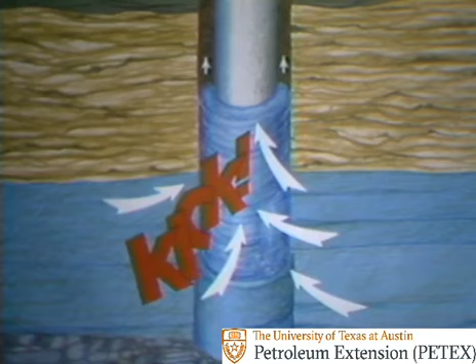Pretty awesome. But before a well blows out, it kicks. Formation fluids enter the hole. These fluids force or kick mud up the well bore. If you don't take the right action right now, your rig could wind up like this.

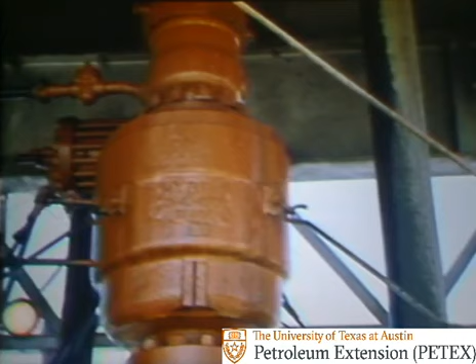So you have to contain a kick. And that's what the blowout preventers are for. When closed, they contain the kick. A closed preventer seals off the top of the well. It's like closing the valve on a pipeline. With the BOP closed, no more kick fluids can enter the hole.

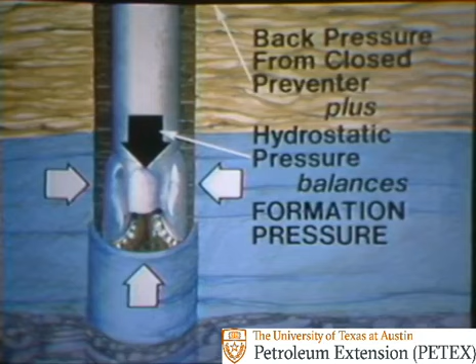Back pressure from the closed preventer plus the hydrostatic pressure of the mud balances formation pressure. No more formation fluids can flow into the well. And that's why you have to close in the well when you detect a kick.

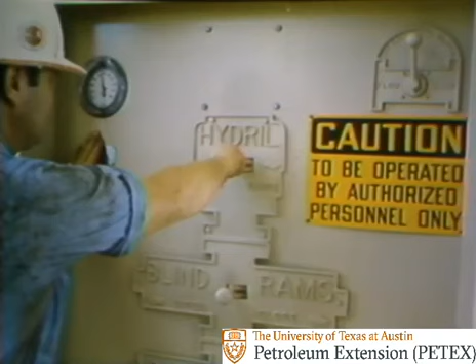But you got to know what you're doing. Use the preventers carelessly and you could cause problems. You could even lose the hole. So let's find out more about well control.

Here's some of the major causes of kicks: mud weight not heavy enough, not keeping the hole full of mud, and swabbing the hole. Let's look at these in more detail.

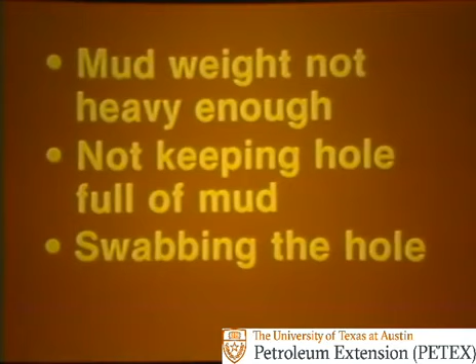First thing is mud weight. The mud's got to be the right density or weight at all times. Otherwise, this could happen. The mud won't put enough pressure on the formation, and formation fluids enter the hole.

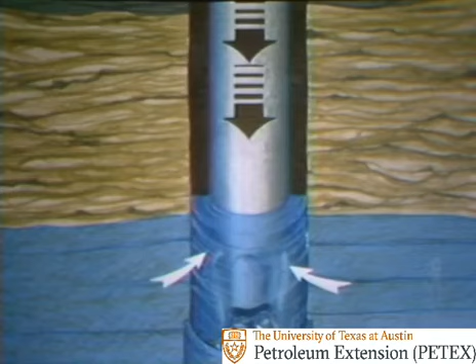Of course, the heavier the mud is, the more pressure it exerts. But you have to use mud that's the right weight. In fact, drilling's usually done with mud as light as possible. The rate of penetration is faster with light mud, so the possibility of a kick is always present.

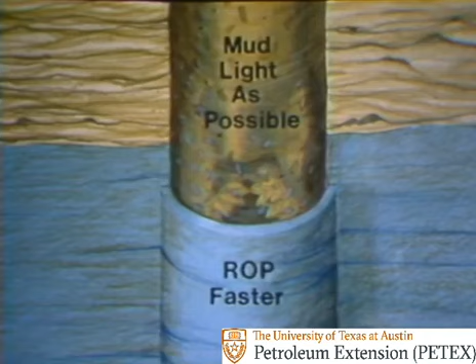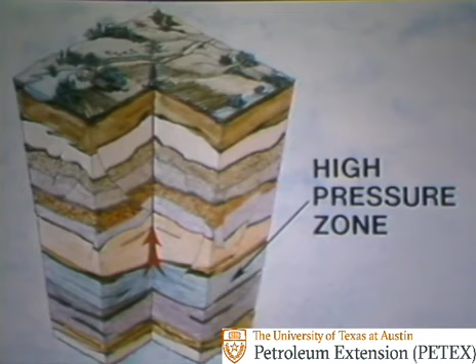Also, wells are being drilled deeper than ever, and the deeper you drill, the more likely you are to penetrate zones of high pressure. Drilling into a deep high-pressure zone could mean that the hydrostatic pressure exerted by the mud is too low to hold back formation pressure. For example,

here the hydrostatic pressure is 5,400 psi, but the formation pressure is 5,800 psi. The well's kicking. The mud weight is not heavy enough to hold back the formation pressure. So you got to watch out for high pressures when you're running that brake.

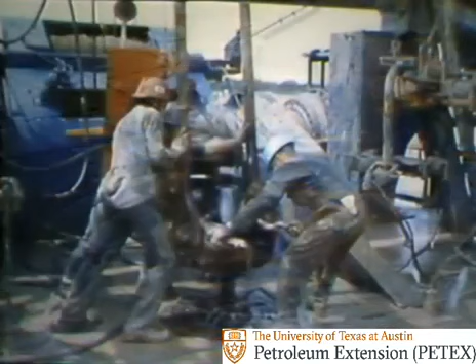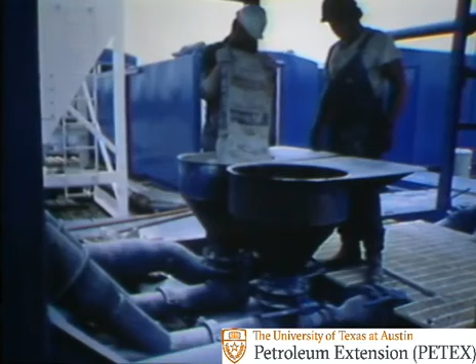Okay, so much for drilling, but nearly half of all kicks occur during a trip. So, to avoid kicks while tripping, be sure to condition the mud before you start out of the hole. And as the pipe is tripped out, keep the hole full of mud.

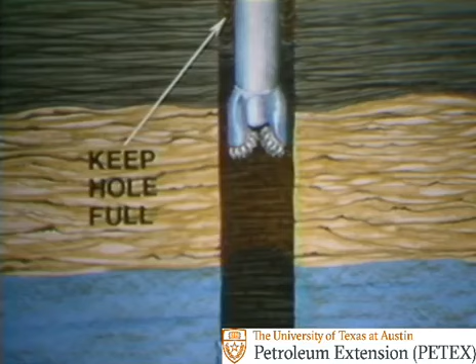Keep the hole full at all times. Remember, hydrostatic pressure depends on the height of the mud column as well as its density. So when you make a trip, slug the pipe so it'll pull dry. This keeps mud in the hole where you need it.

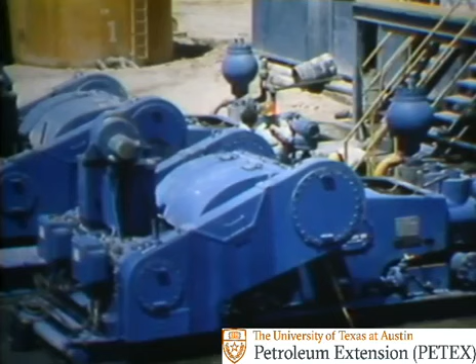Also, carefully measure the mud pumped in to replace the volume of pipe pulled out. Point is, keep the hole full of mud.

Another problem during trips is swabbing. The bit and drill stem can act like a swab or piston and pull formation fluids into the hole. Here the hole's full, but not of pure mud. Swab in enough formation fluids and you reduce the hydrostatic pressure. The result could be a kick.

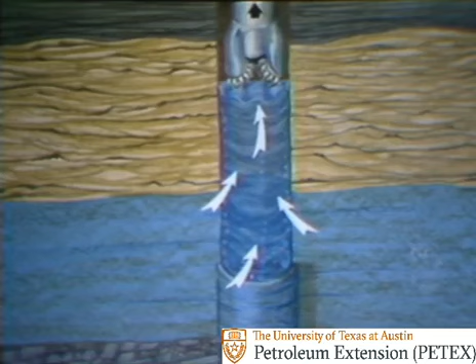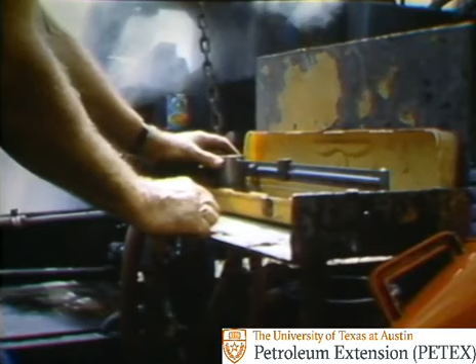So what do you do to reduce swabbing? Well, when the mud's real thick or viscous, swabbing is more likely to occur. So when you can, keep the mud's viscosity down. Also, when your mud weight gives you only a small hydrostatic overbalance, watch out for swabbing.

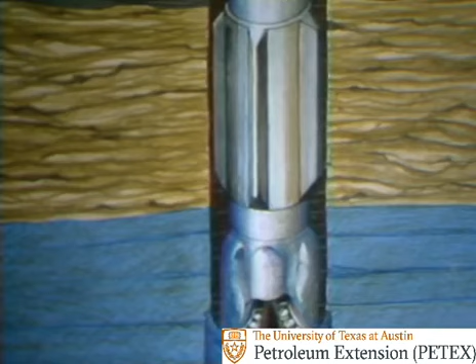Swabbing is more likely, too, when the bottom hole assembly is pretty close to the size of the hole. In effect, the piston's bigger, and it'll be more likely to swab. And if you pull the pipe out of the hole too fast, you're more likely to swab formation fluids into the hole.

So be sure to properly condition the mud before you trip out and pull the pipe slow enough to minimize or prevent swabbing.

Here's one way to know that you've swabbed. You'll notice that less mud is needed to fill the hole because of the swabbed-in fluid.

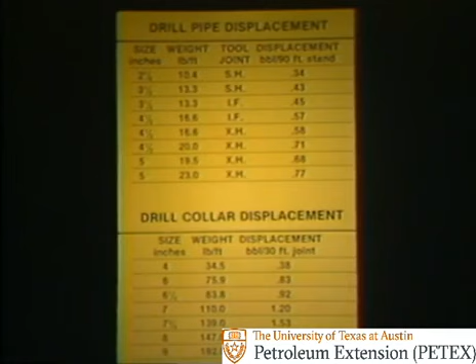For instance, reading left to right, if you're pulling 4.5-inch 16.6 IF drill pipe, each stand displaces a little over half a barrel, 0.57 barrels to be more exact.

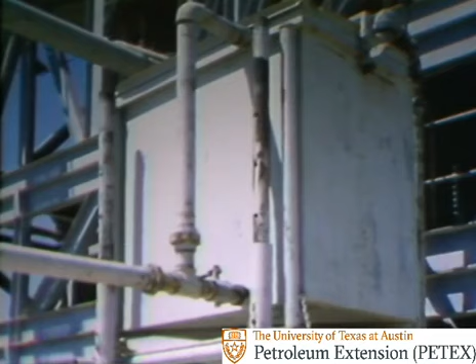You can use a trip tank to measure the number of barrels it takes to fill the hole. This is the most accurate way. But you can use a pump stroke counter, even though it's not as accurate as a trip tank.

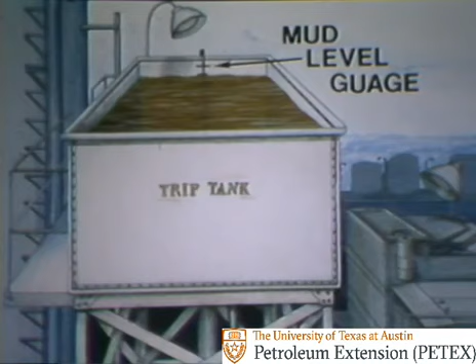A trip tank is just a small mud tank with some sort of mud level gauge on it. The mud level in the tank should drop as each stand or row of stands is pulled. It should drop by an amount equal to the volume of pipe pulled out of the hole.

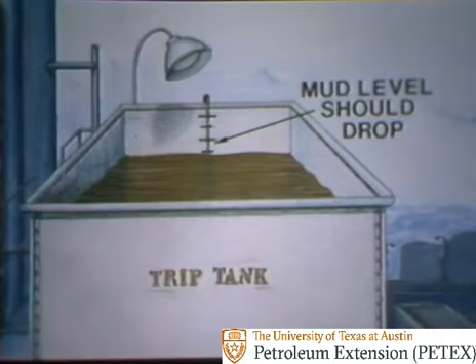If it drops less, then you can figure you probably swabbed formation fluids into the hole.

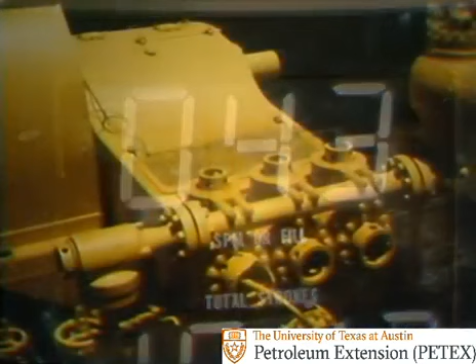You can also use pump stroke counts to calculate hole fill-up because a mud pump is like a positive displacement meter. In other words, each time the pump strokes, it puts out a given amount of mud.

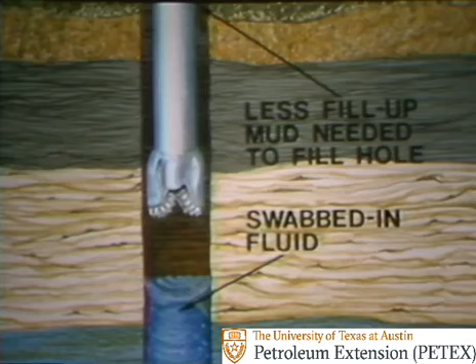Using the pump's liner size and stroke length, you can figure out how many strokes it takes to put 1 barrel of mud into the hole. Of course, if swabbing's occurred, the pump takes less strokes than it should to fill the hole.

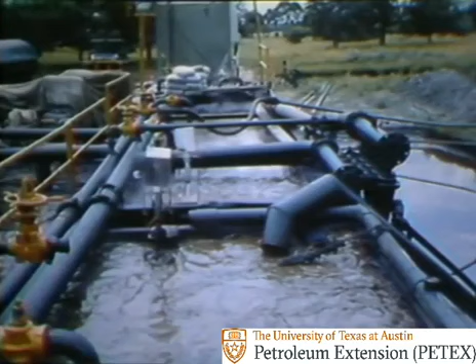By the way, you can't really use the regular mud pits to measure in fill-up mud. Trouble is, the level in a large pit won't change very much until a lot of mud has been added to the hole.

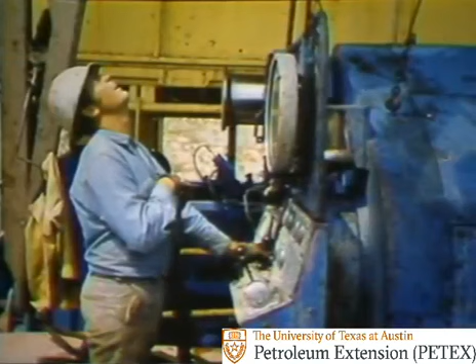Lost circulation is another problem that's kind of related to swabbing. How? Well, as you know, if you move the drill stem too fast when coming out of the hole, you may swab.

Similarly, when going in, just like when coming out, the bit and drill stem can act like a swab or piston and create a pressure surge as the drill stem goes down the hole.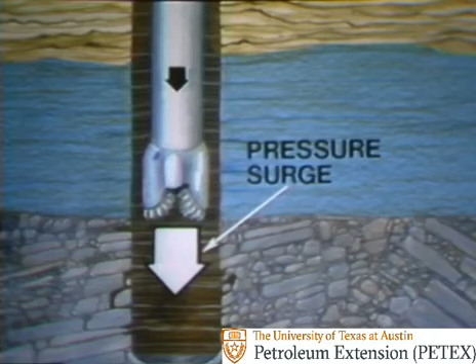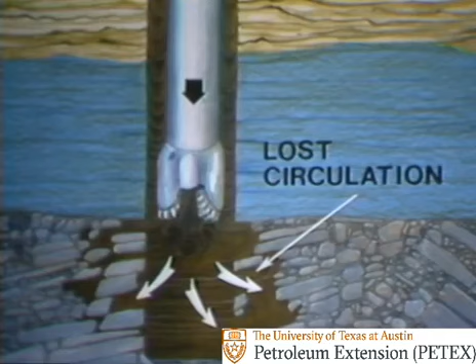And sometimes a pressure surge can cause lost circulation. The surge breaks down or fractures the formation. Thus, the mud level in the hole falls, reducing hydrostatic pressure.

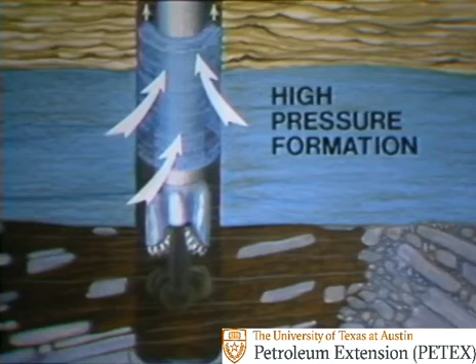And if a high-pressure formation is open to the well bore, then formation fluids enter it, causing a very dangerous situation.

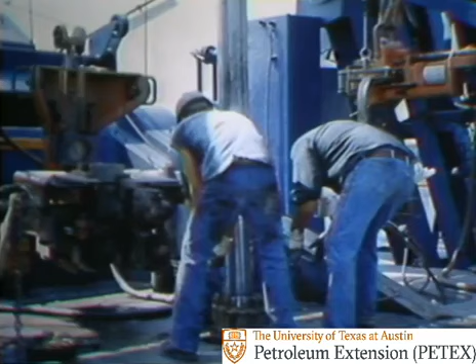So be sure to run the pipe back in the hole at a slow enough speed to minimize pressure surges. Also, make sure the mud is well conditioned. Its viscosity, gel strength, and wall cake thickness all affect how big the pressure surges will be.

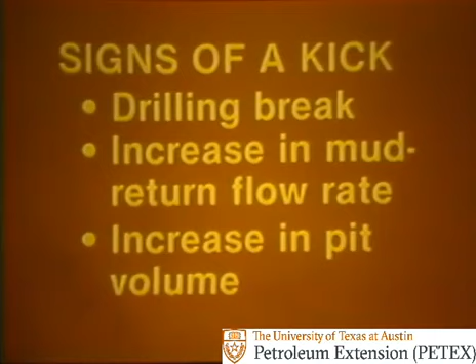Well, some of the signs of a kick while drilling are a drilling break, an increase in the mud return flow rate, an increase in pit volume, a decrease in pump pressure, an increase in pump speed, a chloride increase, gas cut mud, and a change in cutting size.

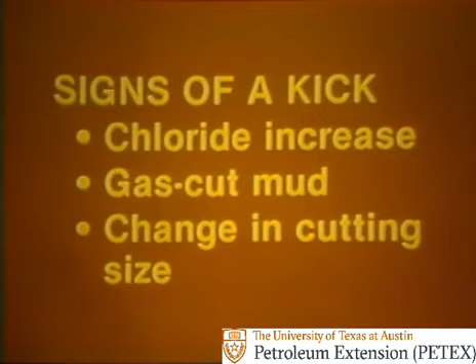A drilling break is an increase in the rate of penetration. The increase can be spectacular. The bottom drops out. Or it can be minor, like from 6 minutes a foot to 5 minutes a foot.

But spectacular or minor, a drilling break may indicate a kick, because a kick lifts cuttings off the bottom very efficiently. The bit starts working on uncut formation, so the rate of penetration increases.

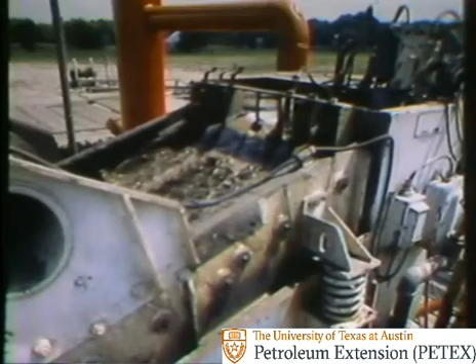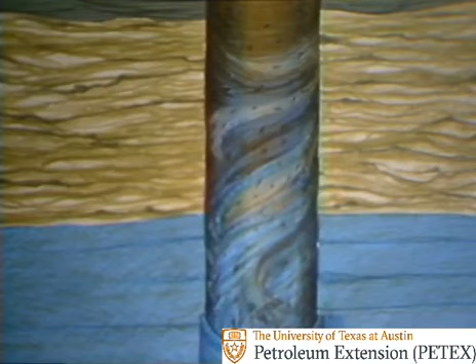Another sign of a kick is an increase in the return flow rate of the mud. Increased return flow is a good sign of a kick because anytime formation fluid enters the hole, it causes the mud above it to flow out faster.

A return flow sensor is a useful tool to help you see an increase in return flow. This one has a paddle sensor in the return line that moves as mud flows past it. It sends a signal to a meter on the rig floor where flow is shown as a proportionate reading. If flow increases, the meter can warn the driller.

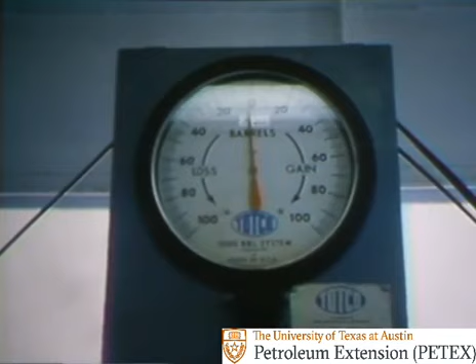Of course, if the return flow increases, then it'll only be a short time before there's a gain in pit volume. So it's really good if your rig has a pit level indicator to warn of a pit gain or loss.

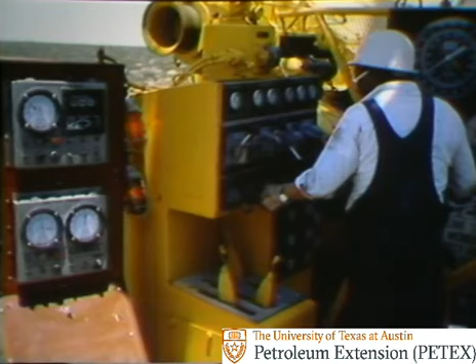Also, it's good to have unscheduled pit level or flow sensor drills so that everyone knows what to do when a real kick happens.

Another sign of a kick is a chloride increase. The mudman can detect a chloride increase. It could mean that you've taken a salt water flow downhole.

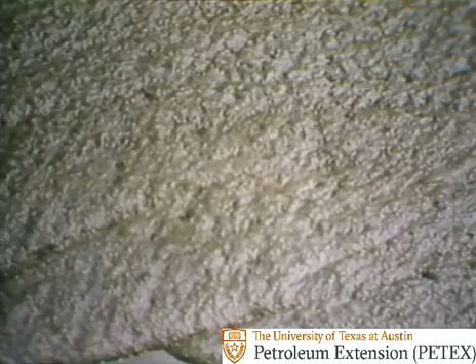Gas cut mud may also be a kick warning sign, but often it's not. Thing is, a little bit of gas that enters the hole at the bottom expands fast as it circulates up the hole.

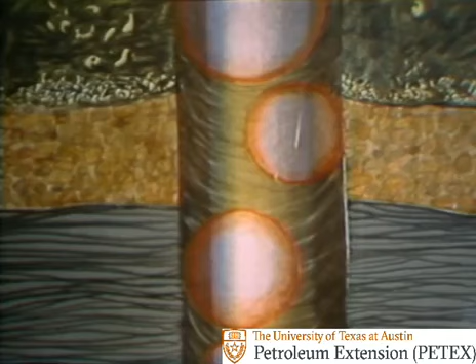In fact, what's only 1 cubic foot of gas at bottom expands to over 1,000 cubic feet at the surface.

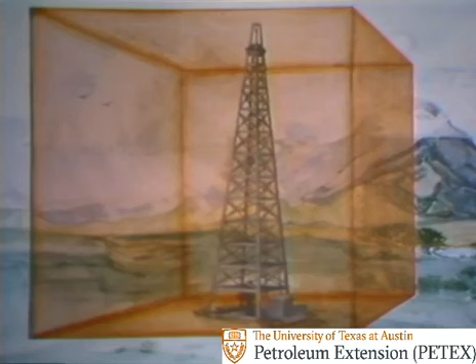Gas expands rapidly as hydrostatic pressure on it is reduced. So what can be a lot of gas on the surface probably isn't very much on bottom.

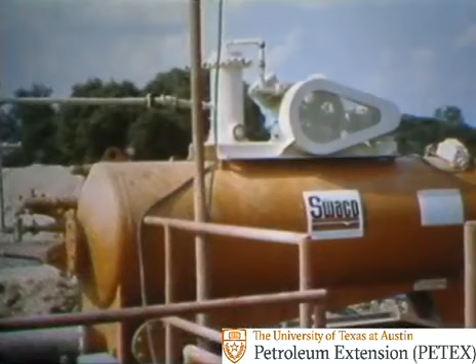But be sure to degas the mud. If you don't, you run the risk of cratering your pump from severe knocking.

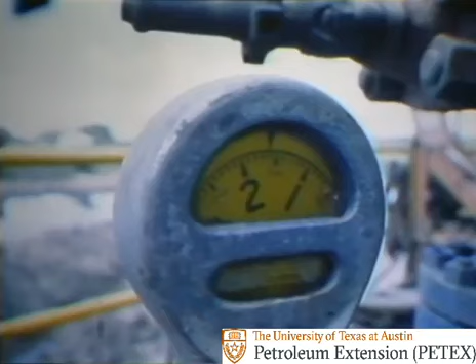Still, another sign of a kick can be a decrease in pump pressure and a corresponding increase in pump speed.

What happens is that when kick fluids enter the well bore, they lighten the mud column. It's easier for the pump to move mud that's been made lighter by kick fluids.

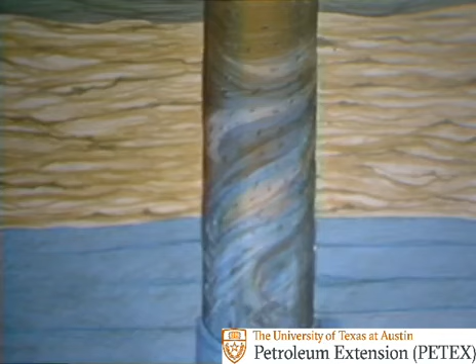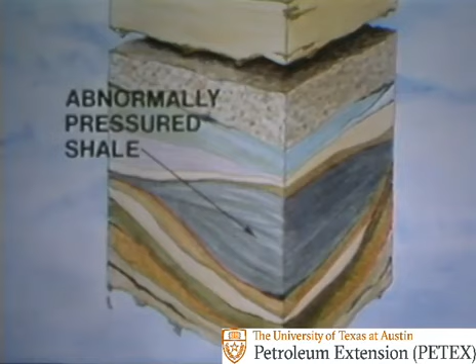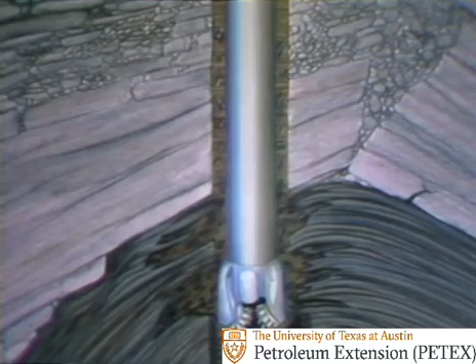Another possible sign of a kick is a change in the size of the cuttings. For instance, sometimes shale formations are abnormally pressured. When drilled, the shale sloughs or heaves, and the pieces are circulated to the surface. At the shaker, the heaving shale can show up as long slivers.

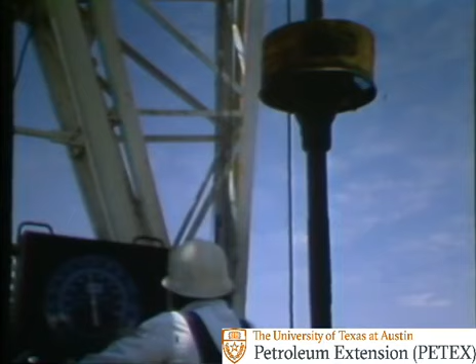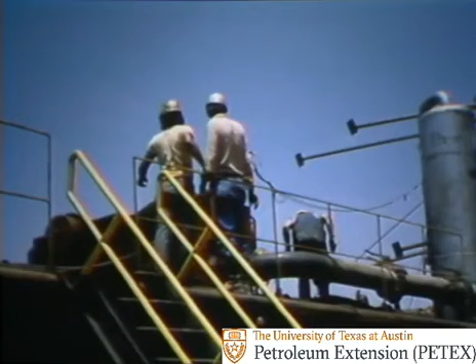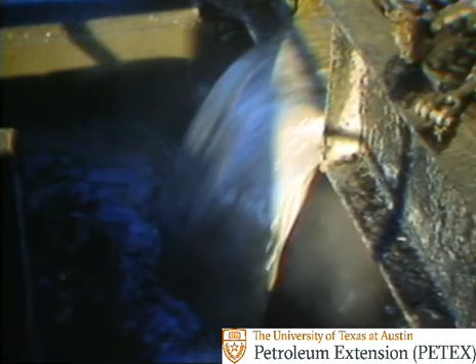So, what do you do when you think you may have taken a kick? Well, don't ever hesitate. Anytime you suspect that a well has kicked, pick up off the bottom, shut down the pump, and see if the well continues to flow, even with the pump off. If it does flow with the pump off, you've definitely taken formation fluid into the well bore, so shut the well in. These are the first steps in controlling a kick.

There are more, but for right now, stop the tape cassette and work exercise 2. After working the exercise, return to the third part of the program.

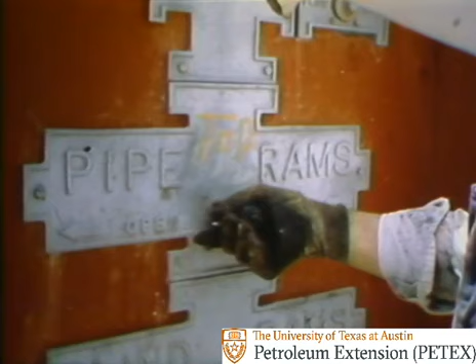So far, you've seen what causes kicks and some of the signs of a kick. Now let's go one step farther and take a look at what happens when you shut the well in on a gas kick. Let's say a large gas slug enters the well bore from a high pressure formation. All the signs of a kick are present. This isn't gas cutting, this is a kick.

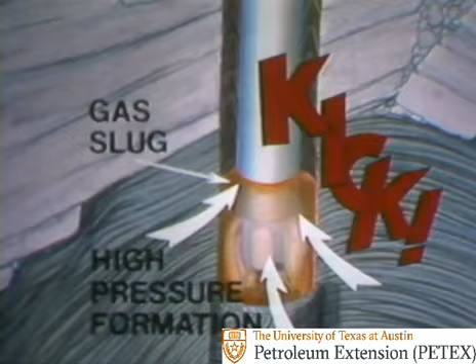You've shut in the well to stop the flow of fluid, but no one knows what to do. So the gas slug will rise up the hole. It rises because it's so much lighter than the mud, but it can't expand. The well's completely shut in. The gas pressure is the same as formation pressure. In this case, let's say 5,800 psi. This is because you shut in the well as soon as the gas entered.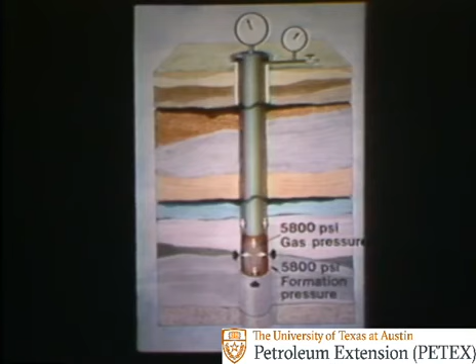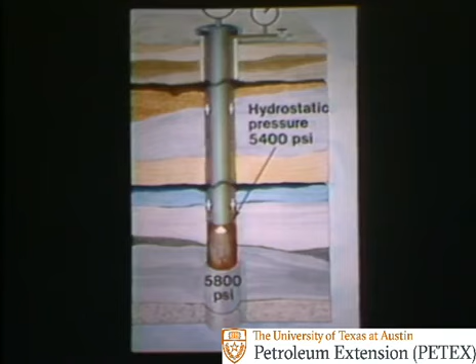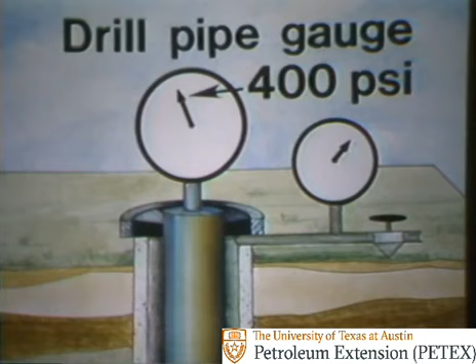The 5,800 psi gas pressure is offset by the hydrostatic pressure of the mud column, 5,400 psi, plus the 400 psi shown on the drill pipe gauge. This is back pressure being held on the well by the closed preventer. The shut-in pressure of 400 psi plus the hydrostatic pressure of 5,400 psi equals a bottom hole pressure of 5,800 psi. Everything's fine for the moment.

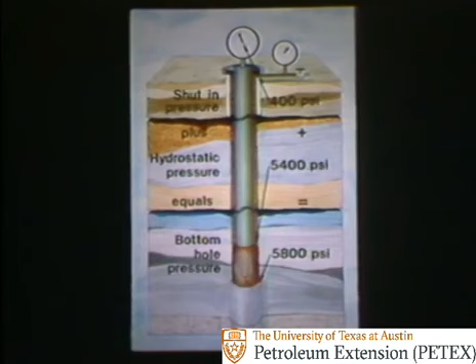But not for long. Because gas is so much lighter or less dense than mud, it rises up the hole. Here the gas has risen halfway up the hole. The well's still shut in, so the gas is not expanded. It still has the same 5,800 psi pressure it had when it first entered the hole. The gas pressure stays the same.

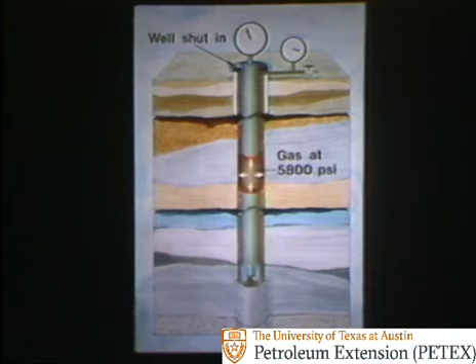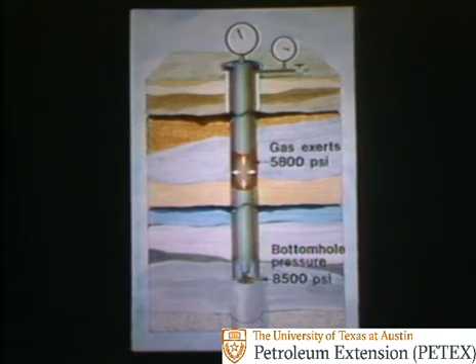So we have a problem. Look at the bottom hole pressure, 8,500 psi. That slug of gas halfway up the hole exerts 5,800 psi in all directions. So you have to add 5,800 psi to the 2,700 psi of hydrostatic pressure below the slug. That gives you 8,500 psi at bottom.

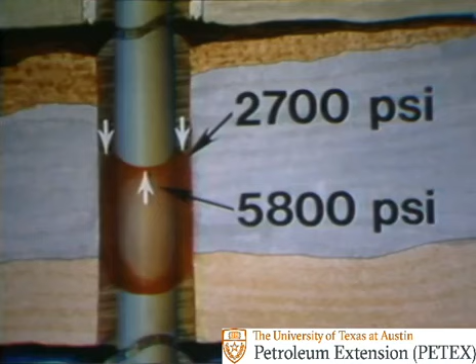Of course, there's the same amount of mud above the slug as below it. So the mud column above the gas slug also exerts 2,700 psi of hydrostatic pressure. But the gas pushes up 5,800 psi. What this means is the hydrostatic pressure of the mud in the top half exerts pressure against the gas bubble, leaving a difference of 3,100 psi, 5,800 less 2,700. This 3,100 psi is shown on the casing pressure gauge at top.

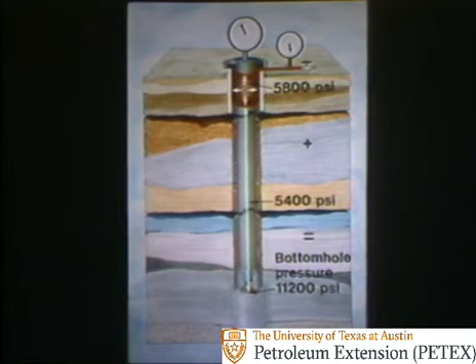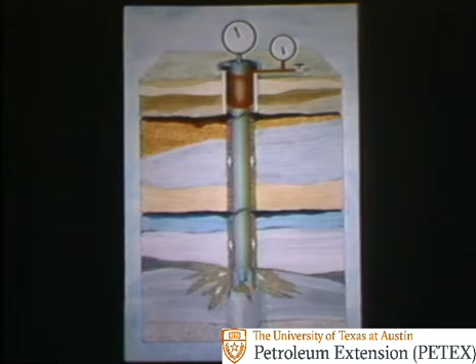Now the gas slug is all the way up to the top. It still has the same pressure as it had on the bottom, 5,800 psi. With the slug all the way up and not allowed to expand, bottom hole pressure is now a whopping 11,200 psi. This is the sum of 5,800 psi plus the mud column's hydrostatic pressure of 5,400 psi. Actually, though, the formation would have broken down long before the gas ever got to the top. This is why it's very important to know what to do after the well is shut in.

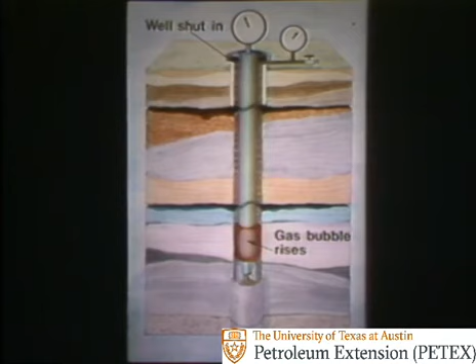Just remember, after the well is shut in, the gas bubble starts rising up the hole. As the gas rises, you have to have some way to open or vent the well to allow the gas to expand. But you can't open it too much. Back pressure would be reduced so much that the well would kick again.

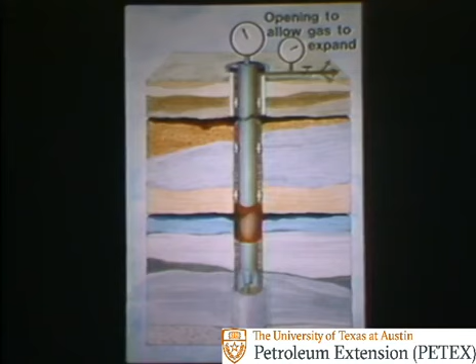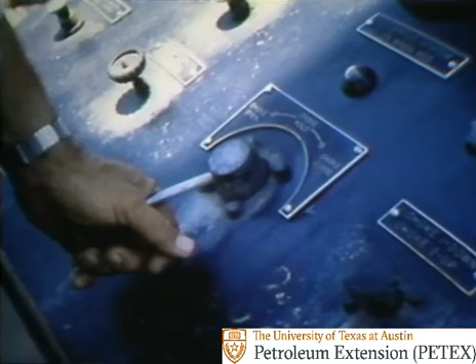So here's a choke, a special valve with an opening you can adjust. By reducing or increasing the size of the opening, you can vent gas and mud from a shut-in well and keep the bottom hole pressure constant. In the next program, you'll get to see how to adjust the choke to properly circulate a kick out. But for now, stop the tape cassette and work exercise 3.